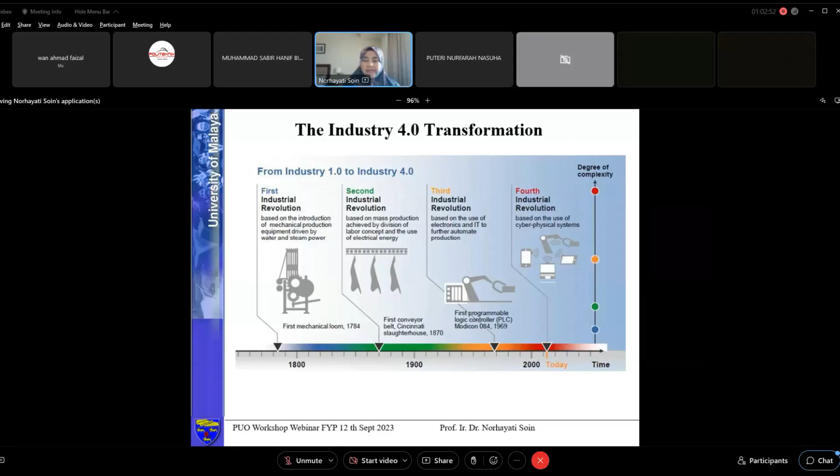So this is about all the connecting devices. In third industry, you have the computers, but not everything is connected. But nowadays you can have everything connected, where you can see all the updated results from your phone and other electronic gadgets. So it doesn't matter whether it's electronic, civil, or mechanical engineering, you need the data.

That's why you can see smart mobility and all of this environment needs so much data, big data. We need to use the data in order to find the solution, to troubleshoot the problems. That's why we think about big data, and how you want to improve the system, and then you need to have the prediction.

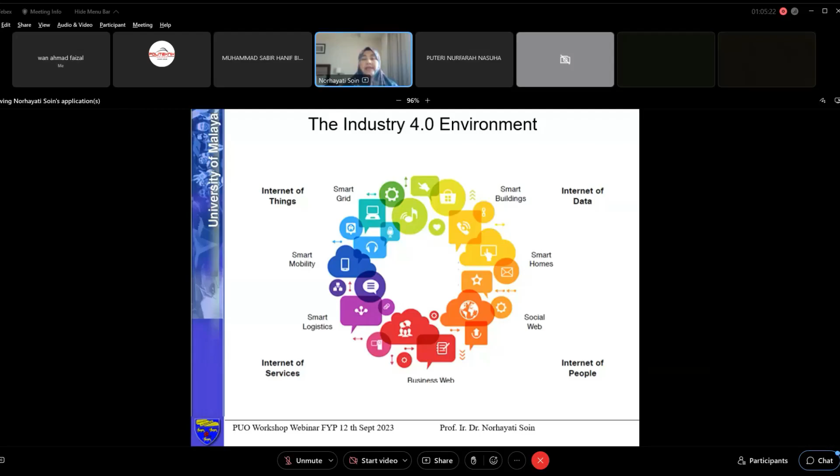Everything, as engineers, when you do the design, you need to predict. What is the warranty? What is the lifetime of all the design? So you need to have the prediction, you need to have the software, and then you need to have machine learning and artificial intelligence. So that's all the emerging technology to support this Industry 4.0 environment.

So these are the 9 technology pillars where you have to refer in order to improve the content of your existing project.

For example, you can start from simulation and augmented reality. Nowadays there are so many applications using augmented reality. Then you have horizontal and vertical integration, this is for the fabrication, for the material. And industrial Internet of Things, the automation of the industry.

And cyber security. Cyber security is one of the important aspects where nowadays you have all the internet or Wi-Fi connection, where you have to secure the data. So we try to reduce all the hacking, losing information. So we need this one of the important pillars, cyber security.

And then you have cloud computing. For the cloud, I believe that everybody already implements this. You save your data, you save your design in the cloud.

And then additive manufacturing. If you think about the production, for civil engineering for example, you need to produce the components for construction, components for maybe the design in terms of transportation. We can apply additive manufacturing, so that is the fabrication. Nowadays people use 3D printing in order to produce the product.

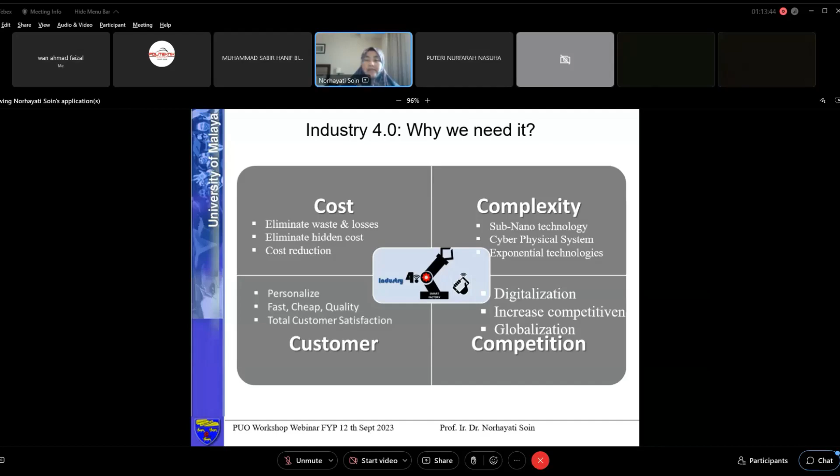So when we have this type of Industry 4.0, actually we are on track, even though Malaysia is still in the IR 3.0 era. But yeah, of course we already have the framework, but all the industries, all the education institutes, we have to support this framework of IR 4.0 in Malaysia. So this is the framework.

When we have this type of IR 4.0, it is about connecting worlds in terms of applications, right? So you have the data, and that data will be transmitted in order for any particular post or any particular duty. They can move by using the online or the data coming from the internet. So this is the example where you can have the storage - whatever that you design, you want to save, you can have the cloud for the storage of the data.

And actually, when we talk about these IR 4.0 related projects, it doesn't mean that you have to do everything, right? I know that for the diploma level, the lecturers or the supervisors already have their own scope of specialization. So that's why they would have the elements that have to be added into the design.

Maybe for those who are really interested in software, they can do the apps, right? So maybe for those who are looking at the hardware, they can do the design in terms of 3D printing. So for those who are looking for telecommunication, they can do the wireless transfer. And maybe for construction, they can think about the intelligent building management system - how would they improve the existing system?

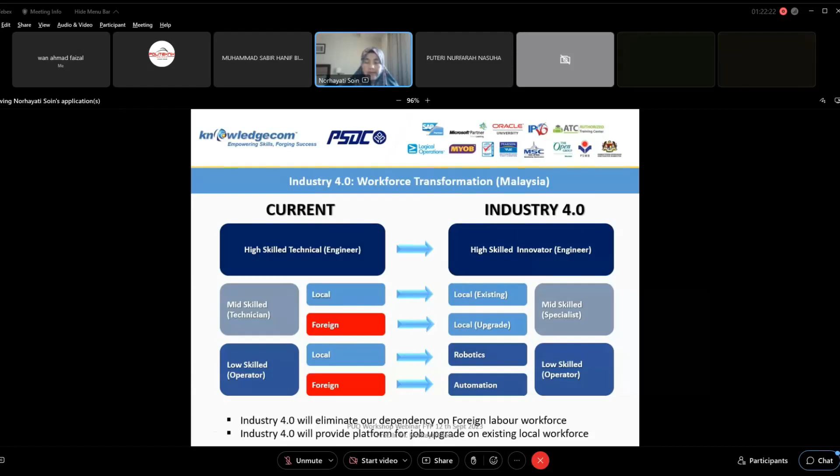Okay, so industry 4.0 will eliminate our dependency on foreign labor workforce, and industry 4.0 will provide a platform for job upgrades of the existing local workforce. That's why reskilling and upskilling is very important nowadays.

Okay, so this is about the scope of the project. As I mentioned, you have the 9 pillars, and these 9 pillars actually involve all of the automation. And when we have automation, you need sensors.

Automation means even if you have robots to do construction or any job, you need to sense the signals, and the signals will instruct the robot to do something. That's why you need all communication to be done using a special device, which will be embedded into the system.

For example, if you do construction, how would the crane on skyscraper buildings be installed and controlled?

And then again for IoT - if you're talking about industry, Internet of Things, you have the IoT, and everything actually comes from digital transformation. So this is something you can already observe going on now.

Okay, so this is how you want to have the element of IR 4.0 in your project. It depends on the facility, but just to have some input, you can have the implementing of big data analytics throughout the current project. So how do you want to improve your existing project?

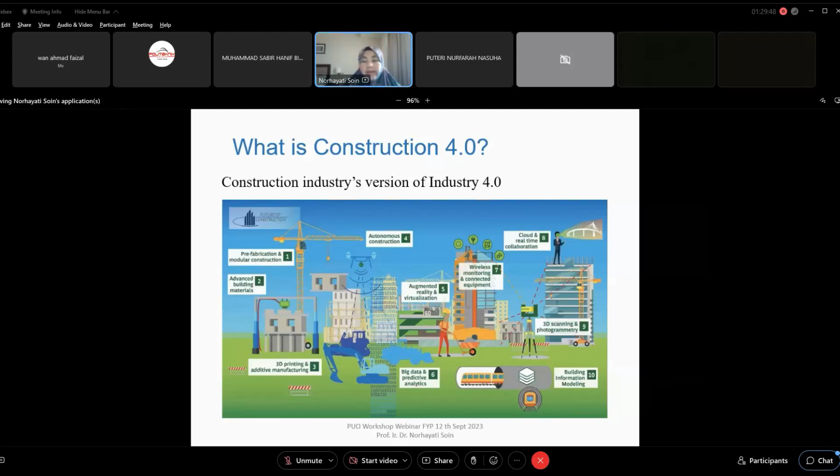Sometimes you feel that it's very complicated, but we will tackle it at different levels respectively. At the diploma level, I believe you have constraints about equipment, facilities, and also the duration of your final year project. So please have some ideas which can be realized within, let's say, 6 months of a final year project duration.

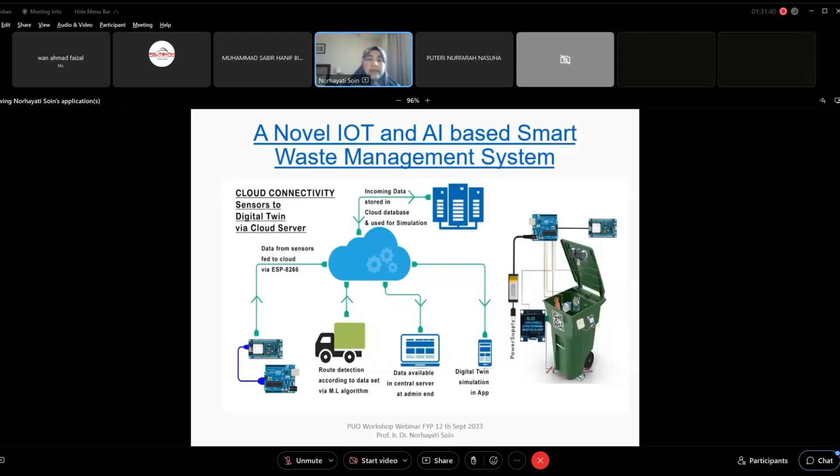So what I've seen, for the final year project, you can think about collaboration of ideas between electrical engineering, mechanical engineering, and civil engineering as well. But if you want to do an individual project, you might think about the design or fabrication of individual components of the construction, and maybe you can design apps in order to do monitoring of any process in the construction process as well.

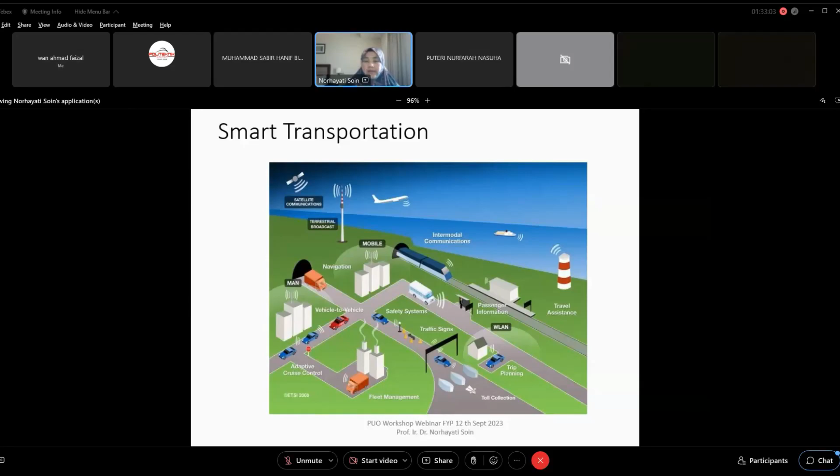So these are the 5 technology best practices that project teams need to embrace: get ready for the smart factory, or in terms of your field, smart constructions, and big data for everyone. Get behind automation on the manufacturing floor, and also the mobile device revolution. Cloud computing powers the smart factory or smart construction.

So this is about whatever project we are doing, the data can be traced anytime and in real time. So whatever improvement we are going to do, we can rely on data from the cloud. That's why you can have online Internet of Things, Industrial Internet of Things. You have real time, you have the cloud, which is safer for you to put your data or save your data.

This is about, if you are in production, if you are in construction, or depending on the field you're involved in, all the elements or machines in the factory or constructions need to talk to each other. That's why we call it a smart factory. So we don't have the operator of the cranes or operator of other machines having difficulties to communicate.

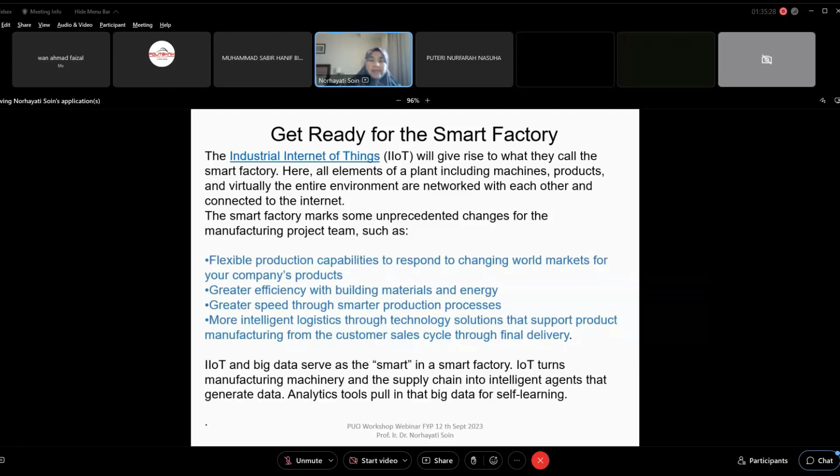So for big data for everyone, as I mentioned just now, the output data from the output points wants to be used so that it can solve problems.

So that's why you have data analytics. You have to describe, predict, and then prescribe the data, so that it can be optimized and used for problem solving, especially for project management. Whatever you want to do, you already have everything online, or real time. Whatever you measure, you need real time data—not lagging for 3 minutes or some other duration. You need real time, otherwise you'll be delayed.

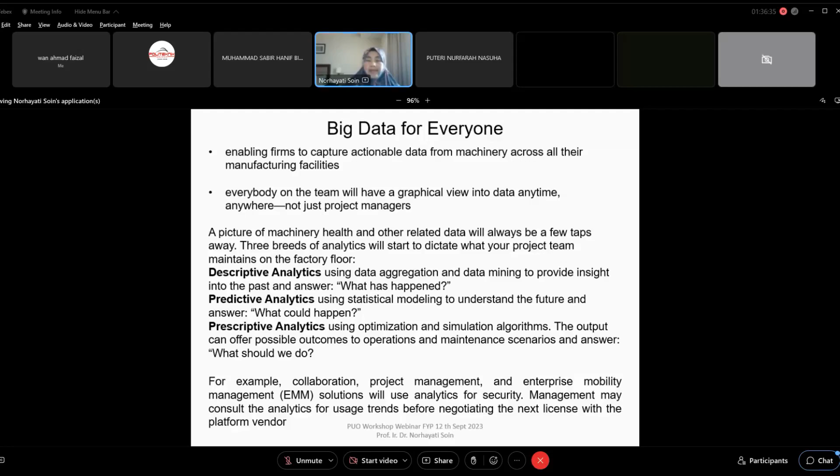So this is all about the industrial revolution, IR 4.0. It's all about the opportunities when you use automation and integration. Of course you will speed up the process and increase productivity.

So when you've already done the design and constructed the building, what's next? Of course you need to manage the building. To manage it you need an integrated, smart system so you can collect all the data online. All points of the building already have sensors, and the output of these sensors is gathered automatically in the control room, so anyone doing observation or monitoring gets real time data. That's why we need an effective project management system, or building management system—everything must be integrated and use a smart system.

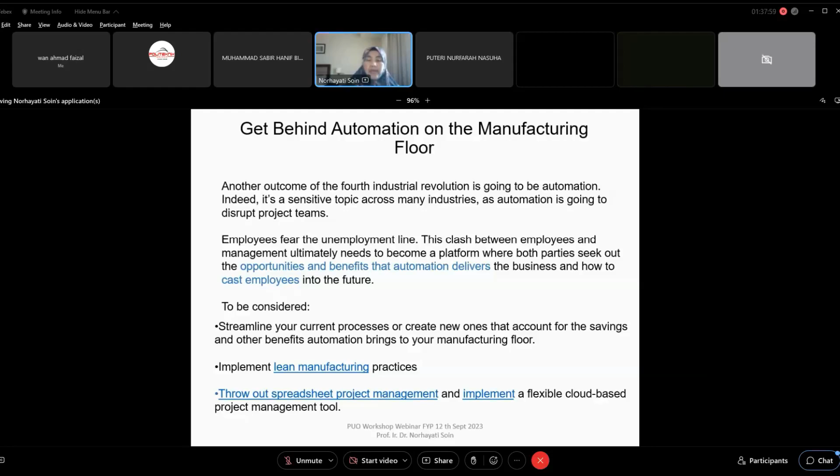Okay, I've also done a model on this—about cloud computing power.

This can be one of the aspects for those really interested in cloud computing, data, and analytics. The lecturers or supervisors can link the group with the IT guys, because it's all interrelated—if you work on integration or automation, you cannot run away from electronics and computing. So I believe those in civil or mechanical engineering who want to do integration or automation of a project need some electronics. You need collaboration, or an existing device or design off the shelf, in order to implement it on your project.

So I'll show you smart sensor technology towards the future smart construction site. Nowadays when we talk about smart or intelligent systems, everything must have sensors—even for safety. Of course you need real effective safety management. When you build a construction, everything needs very good management, especially safety.

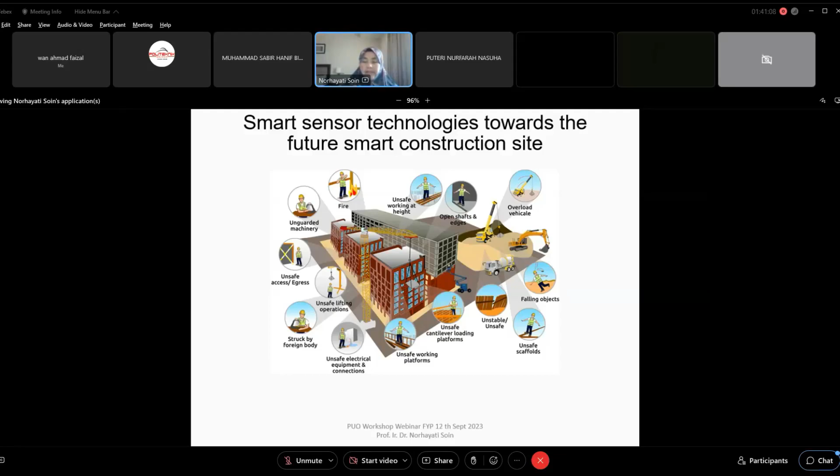And then they must have a smart safety system. All the machineries are connected in terms of quantity, and in terms of time—you cannot delay in delivering all the items, so everything is controllable. This gives the designers or contractors a good output in terms of deliverables.

This is what I mentioned about IoT or IR 4.0—it's not only at the higher level system, but even for the attire or uniform you can have connected devices. For example, with this uniform and this helmet, you already have sensors for blood pressure, temperature, and other biomedical measures like pulse sensors, just like your smartwatch.

This is a smart system where the signals can be received by supervisors or the management of OSHA, the Occupational Safety and Health Administration, so they can monitor their staff or workers. This is about safety—all the data can be transferred to other parties automatically. So for those who want to do a project, you can think about designing an automated helmet for safety, or an automated jacket for the workers.

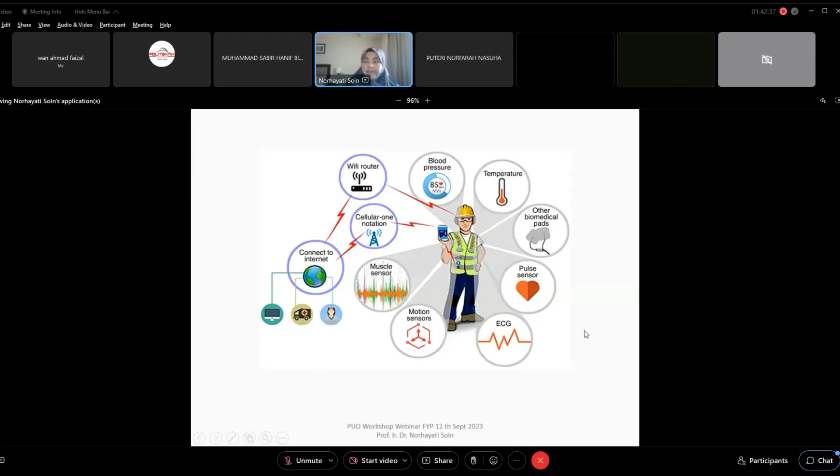Okay, so this is just giving a different view for IoT in construction, where everything is connected data on the construction site, and you can monitor it, the data is available in real time, from design, from site management, and then the people in the office can have real data monitoring.

And also for those in dangerous areas, the duty can be done by using drones. So for the IoT related project, you can think about the design or improvement of drones in order to take pictures in very dangerous areas.

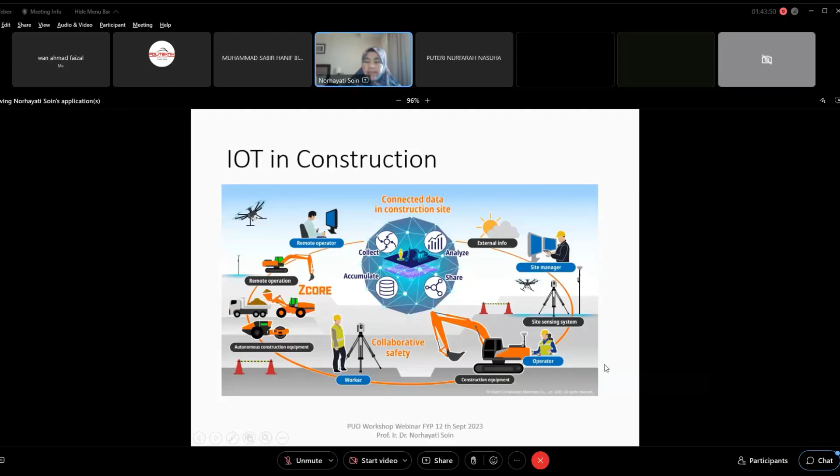But for the project, I believe that for the civil group, you don't have to design the sensor, but you can design the system and buy the sensor in order to do the proof of concept, right? If the electrical or electronic engineers are involved, they can design the sensor. But for those coming from civil engineering, you can design the system, and the sensor can be done by the electronic group, or the sensor can be purchased off the rack.

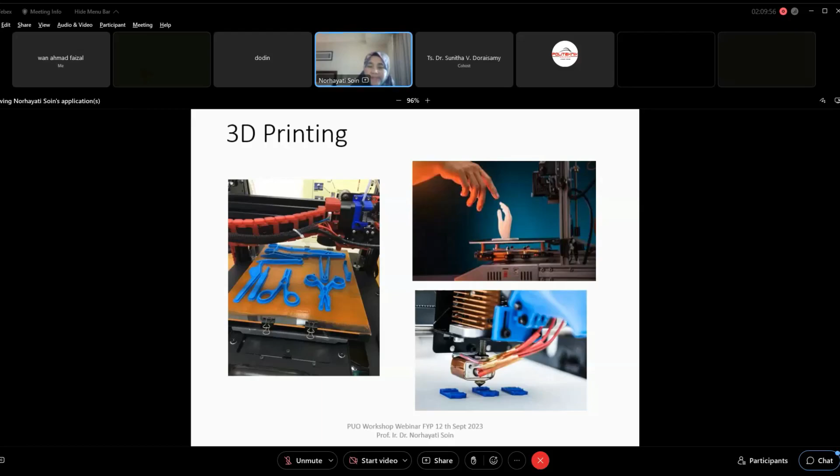Kalau you dah ada projek, dah ada idea, sebenarnya facility ni boleh dibeli dengan kita buat proposal research, so that facility ni boleh masuk dalam budget untuk beli equipment dalam projek ni. Memang kalau untuk teaching bukan senang nak dapat untuk beli barang yang mahal. Tapi kalau kita boleh buat scope of research, supaya projek kita, salah satu projek final year, projek student boleh guna facility kita. Di sini kita perlukan researchers atau lecturers yang boleh apply research grant, dan kita boleh beli facility yang boleh kita gunakan dalam FYP. Agree ke?

Agree ke saya punya proposal ni? Para pensyarah, agree ya, pasal saya tahu bukan senang nak dapat duit beli facility ni, mahal. Jadi Prof, salah satunya buat proposal, so that nanti FYP semua boleh di-create dengan menggunakan kita punya equipment atau facility yang dah dibeli menggunakan duit projek.